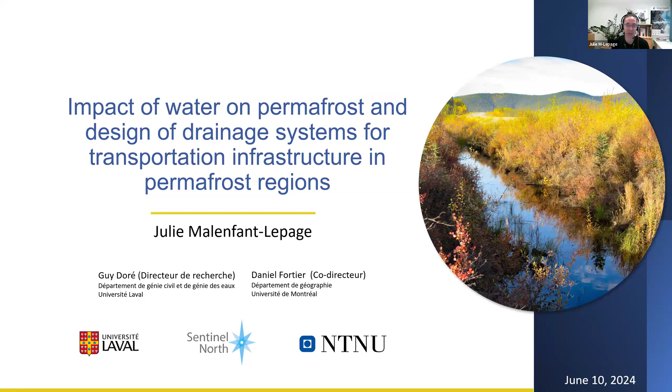We'll just reorganize this. Hi everyone, my presentation today will mainly focus on the research results that I obtained as part of my doctoral studies at Laval University in Quebec, Canada. The title of my presentation is Impact of Water on Permafrost and Design of Drainage System for Transportation Infrastructures in Permafrost regions.

The plan of the webinar today: I'll first start by addressing the issues of drainage in permafrost regions. I'll present the objective and hypothesis of my PhD project. Subsequently, I'll provide an overview of the study sites I had for the research and the main results I obtained for each of these. I will show you the results I obtained regarding erosion and advection. When I refer to advection, it means specifically the process by which heat is transported horizontally by a fluid from one location to another. I'll discuss the progress made during my research and conclude by giving a few recommendations for future research and for engineering practice.

Significant water-related problems around transportation infrastructures have been widely observed across Canada and the rest of the Arctic for several decades. But the warming and extent of damage caused by water flow have long been underestimated in permafrost engineering.

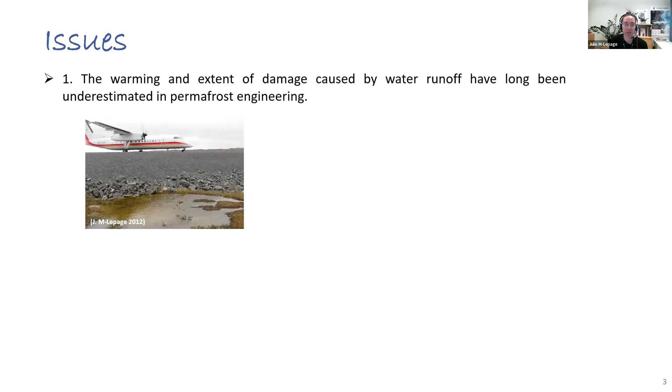I'll give here some examples of significant problems observed along roads and airstrips in the north. We often see water accumulation at the base of embankments in the north. This is a picture of one of the airstrips in Nunavik, north of Quebec in Canada. We see ruptures of culverts and failure of the drainage system. This is a picture taken in Alaska.

We also see a lot of settlements perpendicular to the roads, which are linked to water flowing under the embankment. I've been driving several times the Alaska Highway that drives through the Yukon territory towards Alaska, and I've seen very often towing patterns on the roads that are diagonal, and sometimes they have a little curve, and you don't really think they might be related because you don't see water. But once you go on Google and have a view from above, sometimes it's very obvious—there's a lot of ponding, a lot of water in the area. So that really helps to observe, to see, okay, there is water flowing in that direction, and that could be the cause of the settlements we have been observing.

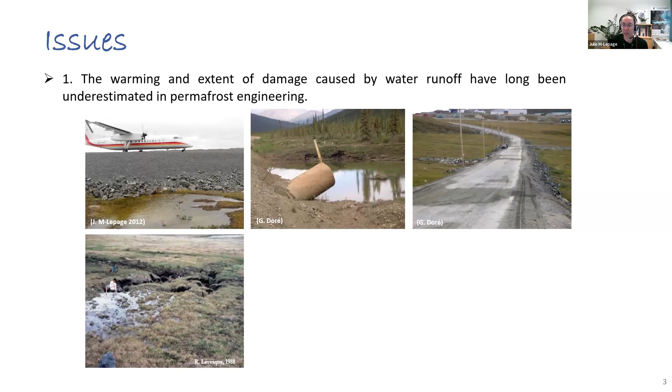In this photo, we see an important thermal erosion event which occurred in the spring of 1988 during the construction of the access road to the Salluit airport. The concentrated flow at the outlet of one of the culverts caused a 2-meter depth gully.

Here we see a significant depression at the toe of the Dempster Highway in the Yukon territory in Canada, and this depression is caused by groundwater flow and is recurrent—they keep filling it, and it always comes back. This photo shows a major thermal erosion event which occurred very quickly, within a month, following the rupture of an aqueduct in northern Russia close to a road. It really shows how quickly thermal erosion can occur.

As you can see, all these problems are likely to reduce significantly the lifespan of transportation infrastructures and safety for road users.

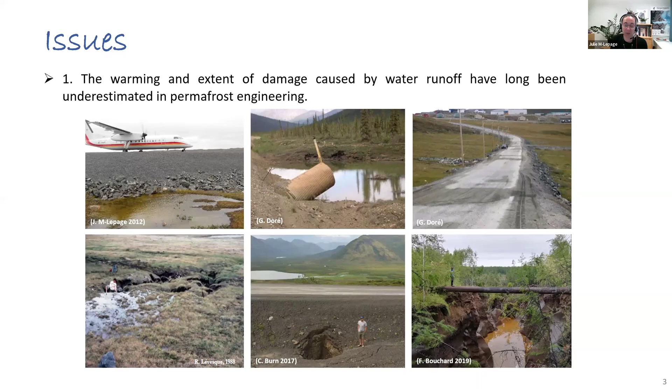What is important to know is that current drainage methods are limited to a set of recommendations to avoid excessive permafrost degradation. We can divide these into 2 main categories. The first is the method with low impact on permafrost, where we try to limit the heat transfer between water and the underlying ground, for instance.

There are many recommendations in the literature for culverts. The picture here is used mainly in the Yukon territory, in the western part of Canada, where they put insulation around the culverts to prevent heat transfer from water flowing into the underlying ground. Other methods in this category are the use of small bridges for crossing streams and permeable embankments.

The other category includes all the methods with controlled impact. So we know that we will have permafrost degradation, but we make sure it occurs as far as possible from the embankment to keep the integrity of our infrastructures. For example, there's a recommendation of building the ditch as far as possible from the embankment, with a current literature recommendation of 10 meters.

In this category we also have water diversion channels, diversion berms, and the addition of water ponding in areas of the drainage system to reduce thermal erosion. This method has been used in China, where they implemented drainage ditches perpendicular to the embankment to drain stagnant water at the embankment toe. But it's important to know that we don't know the thermal benefits of any of these methods, since they haven't been investigated up to now.

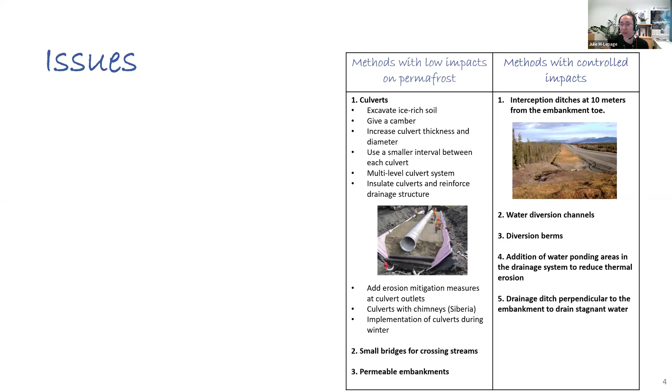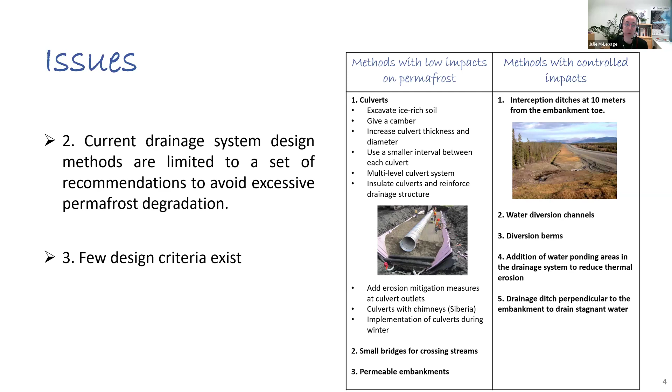The expertise that has been developed in Canada is very local and differs from one region to the other, and there are very few design criteria that exist at the moment. So there is a great need to improve knowledge on the key role of water flow and heat transfer to frozen soils, and on the performance of road drainage systems in permafrost regions.

The main objective of my PhD was to develop new strategies for the design of drainage systems to mitigate permafrost degradation issues resulting from water flow. We had 3 research hypotheses for my research.

The first is: can the Peclet number adapted to soil, proposed by Kane and collaborators in 2001, be used to quantify the risk of permafrost degradation around and under transport infrastructures, and therefore serve as a design parameter, since we don't have a design parameter at the moment?

The second hypothesis was: can the critical shear stress obtained by the erosion device CSM, and the approach proposed by Grabowski and collaborators in 2010, be adapted to frozen soils?

And the last one: is there a correlation between the water flow in a stream or a ditch and the thaw depth?

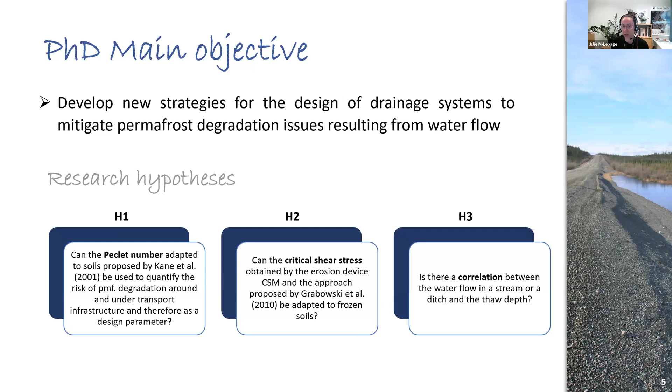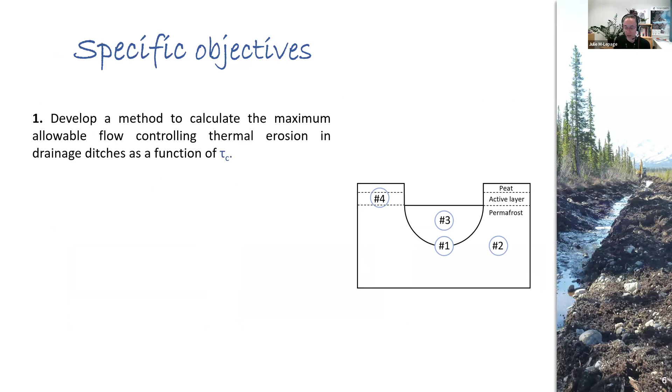Following the hypotheses, we had 4 specific objectives. The first is to develop a method to calculate the maximum allowable flow controlling thermal erosion in drainage ditches as a function of the critical shear stress. You have a sketch of a drainage ditch on the right, showing exactly where each specific objective applies. For this one, it will be at the bottom of the drainage ditch.

For the second objective, I had to develop a method to limit heat advection caused by subsurface flow along and under transportation infrastructures based on the Peclet number. The third is to develop an allowable flow criterion based on a relationship between water flow in a ditch and thaw depth. The last was to develop a relationship between the thickness of the active layer and the temperature at 30 centimeter depth.

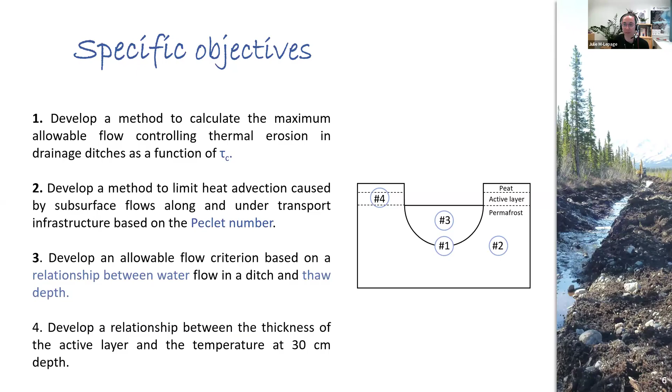Regarding the field work, the main goal was to improve knowledge on the thermal impact of water flow in natural conditions at the beginning, and on the performance of transportation infrastructures in permafrost areas. We selected 3 test sites across the Arctic as part of this research, where the ground is known to be sensitive to permafrost degradation and thermal erosion.

The first test site is in Ilulissat, Greenland. Then I had another test site in Salluit, in the northern tip of Quebec province, Canada. And traveling to the west of Canada, I had a test site right at the border between Alaska and Canada. You also see here the Beaver Creek test site, since I've been using data from this test site for the validation of my results.

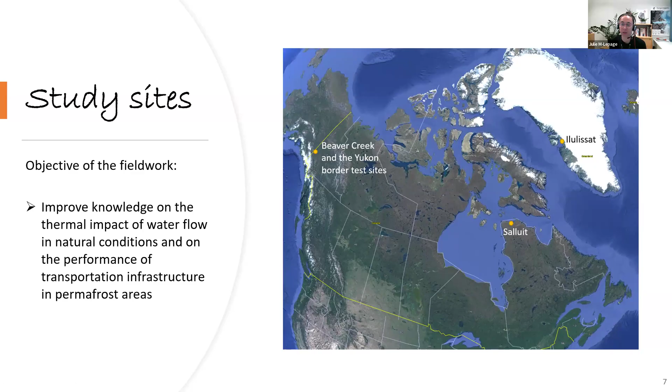All 3 test sites are characterized by fine grain and ice-rich permafrost having a zero annual amplitude near -3 degrees Celsius. At the first site, in Ilulissat, Greenland, the main goal was to study the vertical and horizontal extent of permafrost degradation caused by water flowing and ponding.

So I took a lot of surface measurements at the test site, such as thaw depths, temperature in shallow boreholes, soil temperature at 30 centimeter depths along the profile, stream flow, water temperature, as well as water content of the active layer and permafrost.

So here you see the profiles that were done across the stream and across the two ponds. This site was chosen specifically for this research because of the small, well-defined catchment area. It's very small and there's no trees as well, so it was really easy to see water flowing at the surface.

Also because of the possibility of comparing the results obtained with previous intensive studies carried out in Ilulissat between 1978 and 1985 in connection with the airport construction. So we have a lot of data in this area. The Technical University of Denmark has also done automated ERT surveys south of the airport in past years, surveying through a whole year.

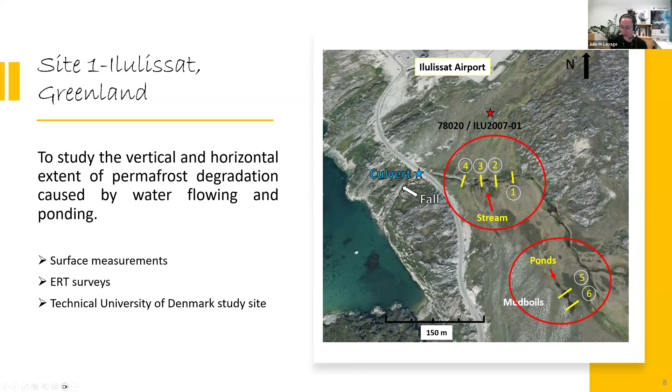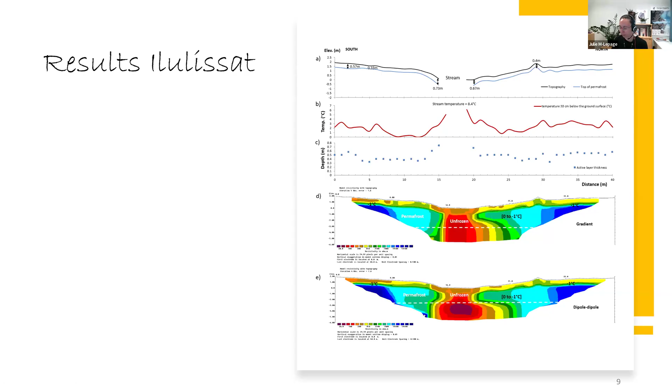So the main result I obtained is that permafrost degradation due to the presence of water occurs mainly vertically. It was really interesting to see at the site that I was probing permafrost just by the stream, and it was very, very close to the surface.

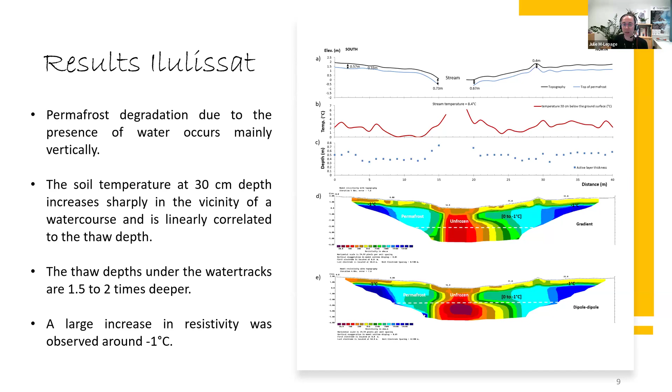The soil temperature at 30 centimeters depth increases sharply in the vicinity of the watercourse and is linearly correlated to the thaw depth. The thaw depths under the water tracks are 1.5 to 2 times deeper. We observe a large increase in resistivity around -1 degree Celsius at the site, and not necessarily between the limit of frozen and unfrozen ground.

The second test site is located along the Alaska Highway, very close to the border with Alaska. The main goal of this test site was to evaluate the performance of a newly constructed rectangular ditch located 10 meters from the embankment near the Yukon-Alaska border.

It's very common in this area to build rectangular ditches, and we expect that permafrost will be degrading. So we put it at a certain distance from the embankment, and once the permafrost is degrading, at some point the vegetation cover will fall over the slopes and protect permafrost again, and we will reach stabilization.

And now there's one that was added between the ditch and the zone between the ditch and the road, added last year. We did also flow rate measurements in culverts during the research, and the ditch has been mapped every year, either with a DGPS, high precision zip level, and we have also LIDAR data available at the test site.

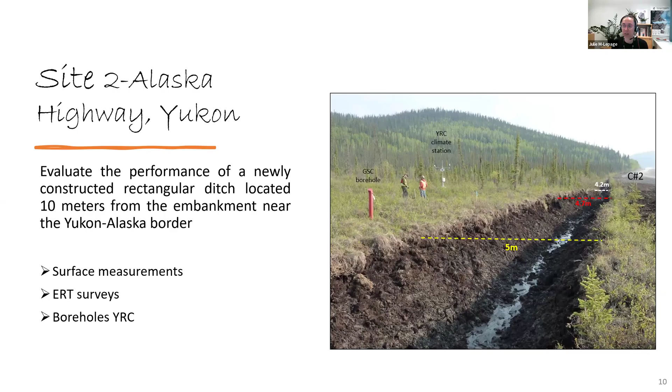It is a site that contains a large network of ice wedges estimated to be over 10 meters deep. The figure you see compares the elevation profiles taken between 2015 and 2017 with the cross-sectional area of soil excavated during the ditch construction in 2013. This is the square you see on the figure.

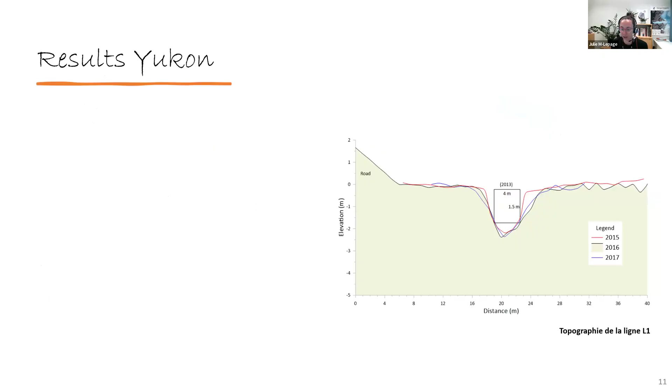If we look at the results, the permafrost thawed very rapidly at the test site in the interceptor ditch during the first 3 years after construction, but the ditch appeared to have stabilized thereafter on the short term. We have now the elevation data for last summer, so I'll be able to see if the ditch is still stabilized on the long term, after 10 years. But in the first 3 years, it did really seem to have stabilized.

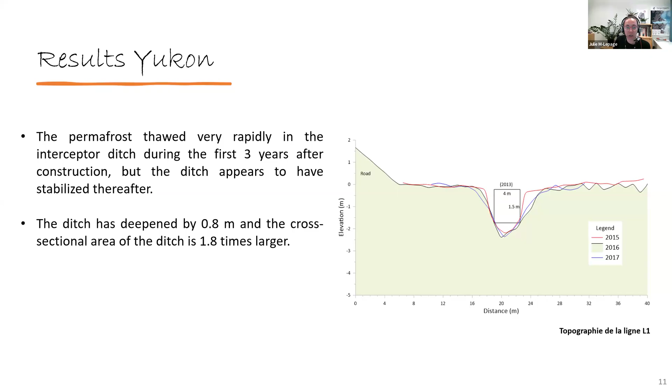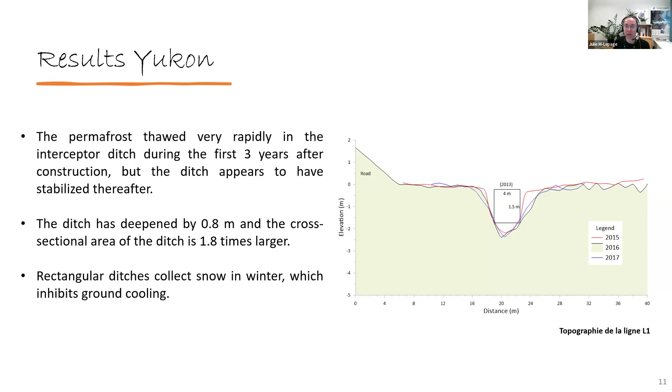From 2013 to 2016, the ditch has deepened by 0.8 meter, and the cross-sectional area of the ditch is 1.8 times larger. Rectangular ditches do collect snow in winter, which inhibits ground cooling. We see that with the borehole located in the ditch. Permafrost here is quite cold, close to -3, so we have to be very careful if we do those ditches in very warm permafrost.

The drainage slope of the new ditch may become inadequate after 2 years of operation, because after construction there was a lot of permafrost degradation that was filled with water. So the drainage can become inefficient very rapidly. It's very important that we maintain those ditches regularly until we reach stabilization.

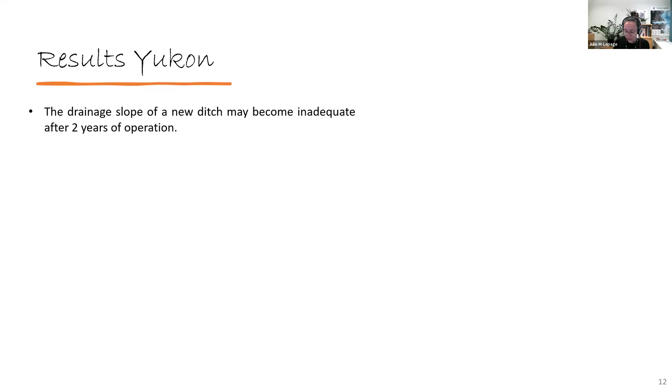Following the excavation of the ditch, there was a waterfall that was created and led to the formation of a thermal erosion gully. The retreat rate we measured was 23.6 meters per year, which is very significant, between 2014 and 2017. And it has a depth of 2.8 meters. The thermal erosion developed into a thermokarst.

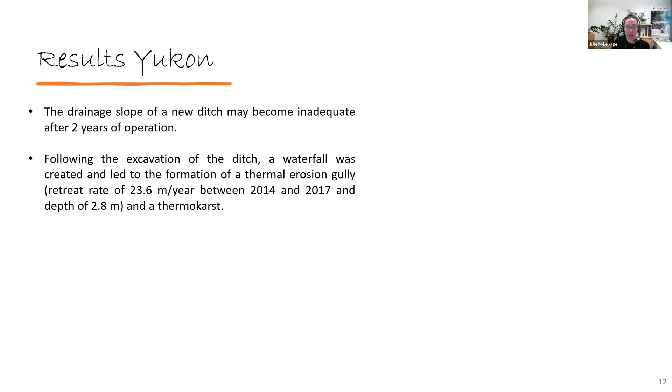I'll show you some pictures here. You have the fall that was created just after the ditch was excavated, because there was a small stream coming perpendicularly to the ditch. Then in April 2015, when we went to the site, we observed that the ground was cracked on the surface and that the stream was now flowing on the ground.

Water probably infiltrated into a sinkhole, and the melting of an ice wedge and an underground tunnel developed. Four months later, in September 2015, the tunnel ceiling had collapsed and a pond had developed at this location. The degradation of permafrost progressed in the following years and led to the development of a thermokarst. Now the water regime in the ditch has changed, because water accumulates in the thermokarst and flows in the ditch only when full.

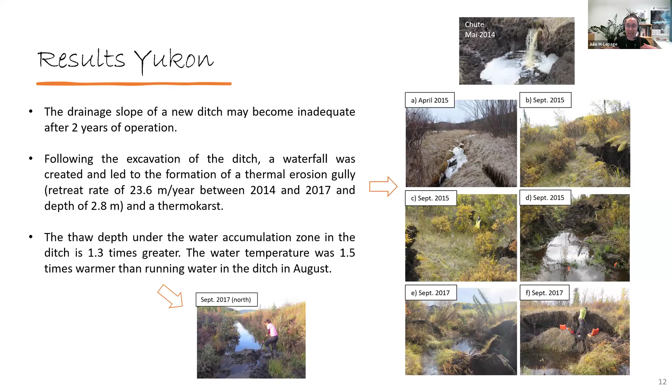Here you see a picture of one of the sections of the ditch. The ditch is 500 meters long, so it's quite long. What happened is that at a few locations the ice wedges melt and release a lot of sediments into the ditch, completely obstructing the drainage. At this location, water has been ponding since the beginning, a very big pond of several meters.

We tried to drain it, but it was not successful, so the water has been standing there since then. What we observe is that the thaw depth under the water accumulation zone in the ditch is 1.3 times greater compared with areas where there's no water ponding. And the water temperature was 1.5 times warmer than running water in the ditch in August.

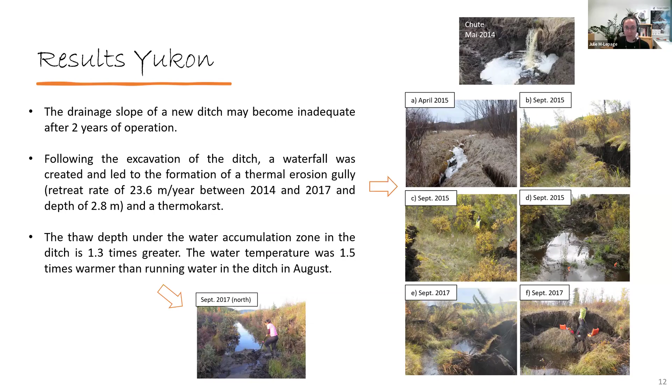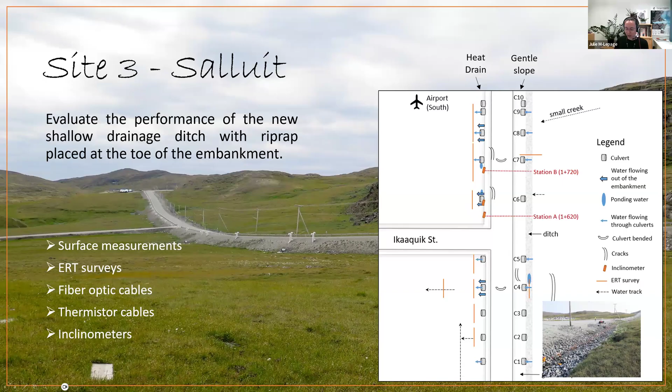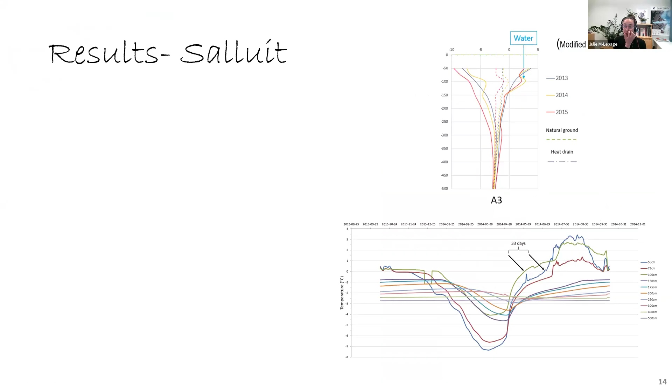The thermistor cables incorporated into the airport access road in Salluit in 2012 made it possible to measure the effect of water flow underneath the road embankment, a phenomenon that is rarely captured. So we did measure a warming of 1.9 degrees Celsius at 1 meter depth on the annual maximum temperature curve that you see on the right.

The borehole is located upstream of the road at the embankment toe. And if you look here, you see kind of a wave in the profile. This is linked to water flow at the test site. So you really have to keep an eye on those wavy profiles in your data, it might be related to water.

And what we observe as well, if you look on the ground thermal regime at the bottom, is that the ground thawed 33 days earlier at 1 meter depth than the ground above at a depth of 50 centimeters.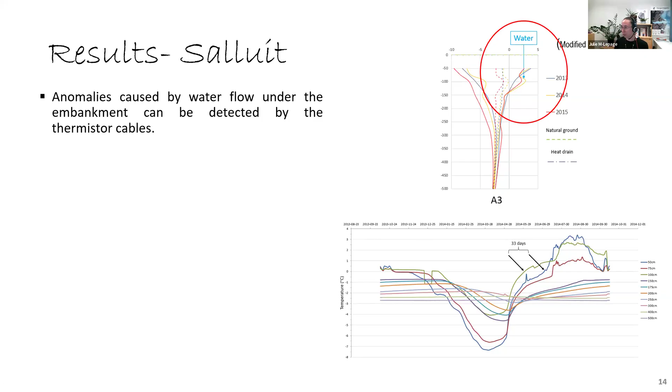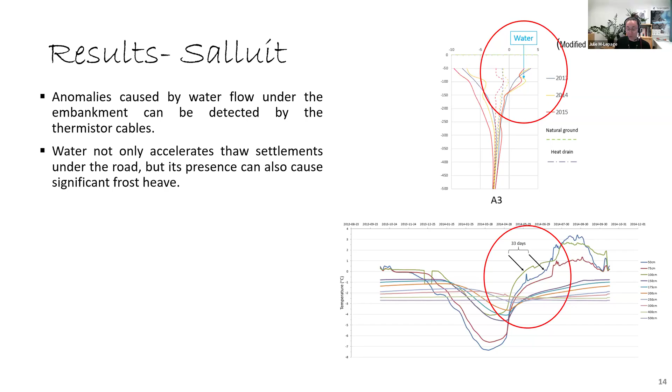We also found out that water not only accelerates thaw settlements under the road, but its presence can cause significant frost heave. I'll show you a picture that is quite relevant.

First, when I visited the test site, I've seen this huge crack along the road, so we were really sure that permafrost was degrading in the embankment slope, even if there was a heat drain that was implemented. But after investigation and analysis of the data from the inclinometer, the team at Université Laval found out that permafrost was not degrading at all, but it was really the movement of frost heave due to water flowing under the road.

So in the winter, when you have freezing, the slope lifts, and then it kind of slides down in the summer during the warm period.

And then as a conclusion, we add that the heat drain can limit permafrost degradation even if there are water flows under the road.

And ERT identifies thaw-sensitive areas along the road. So I strongly recommend using it if you have any drainage work to do along your infrastructures. It's very important to know which zones are very close to thawing.

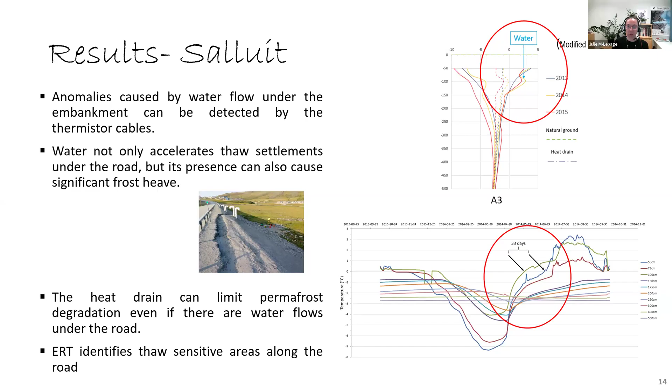Usually if you take temperature measurements, you don't really know how close the ground is to thawing, but with ERT surveys, since it's very sensitive to unfrozen water content, you can really see, okay, that zone, I really need to be careful and make sure water won't be concentrated or ponding into this area. So ERT can be a very useful tool for this.

Regarding the result for the erosion tests, it's important to be aware that sediment motion initiation has been widely studied for over a century, but the erodibility potential of frozen soil is still poorly understood and has been less documented in the literature. So during my PhD, I did some erosion tests to determine the critical shear stress for a frozen silt, which is the type of soil considered to be the most sensitive to erosion.

The critical shear stress is an important erosion parameter and is defined as the pressure generated by water on the soil surface when erosion is initiated.

For my research, I've been using an erosion device called the cohesive strength meter that was developed in the UK. I did these experiments in the lab at the Norwegian University of Science and Technology in Trondheim.

There was a great need in the marine research group here at NTNU to obtain critical shear stress values for the Arctic coastal erosion models. So then we collaborated together on this project.

I also brought the cohesive strength meter to my test site, and I did some in situ measurements. Why is this relevant? There's a lot of erosion devices, and I'll explain why we decided exactly to choose that one.

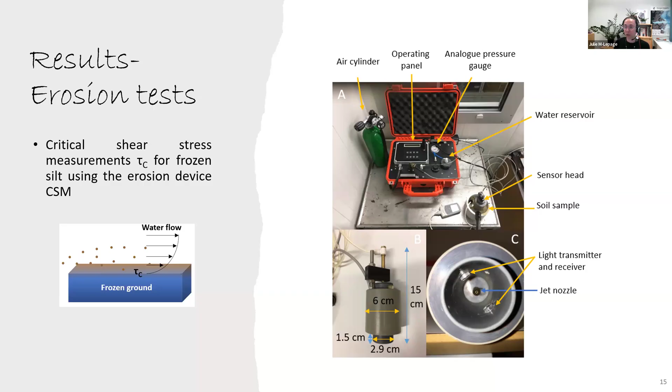And all the soil samples that I tested in the lab were saturated, with no excess water content.

And then there's some processes to do with the data coming from the cohesive strength meter. So I followed the methodology proposed by Grabowski and collaborators. Once you need it, it's very important that you transpose the pressure measured inside the sensor head into a pressure at the soil surface.

So I've been using the methodology from Vardy and collaborators in 2007. Then I calibrated my device in the lab, and I obtained my own equation of P stag, mean pressure at the soil surface. And then once you have this, you need to transpose this vertical pressure into a horizontal pressure. So I used the equation developed in the laboratory by Grabowski and collaborators.

And then once you have the horizontal pressure, you obtain the critical shear stress. So what they did in the lab was test different soil sample mixtures with a flume and a cohesive strength meter, and that's how they obtained the correlation between the two devices.

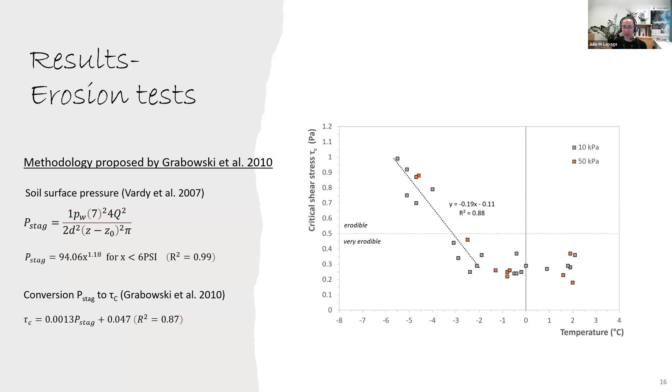If we look at the data I obtained in the lab, it's important to say I used a water temperature of +2 degrees Celsius for my tests. On the graph here, you have temperature and critical shear stress. For temperature below -2 degrees Celsius, the critical shear stress at which soil particles are removed is temperature dependent. The critical shear stress of the silt tested increased by a factor of 1.6 for every degree Celsius decrease between -2 and -6.

But if you look at the data for the partially frozen ground between 0 and -2, and for the unfrozen ground samples, the averages are very similar. I obtained a value of 0.28 Pascal for partially frozen and 0.27 Pascal for unfrozen ground.

It is generally believed that frozen ground cannot be easily eroded since ice bonds soil grains together, increasing the strength of the soil when the ground is frozen. However, the results we have in this study show that this bonding starts to be effective against erosion only at -2 degrees Celsius for a saturated frozen silt.

But it's very important to be aware that if we test different types of soils or clays, for example, we probably need to expect that this relation can be different depending on the unfrozen water content.

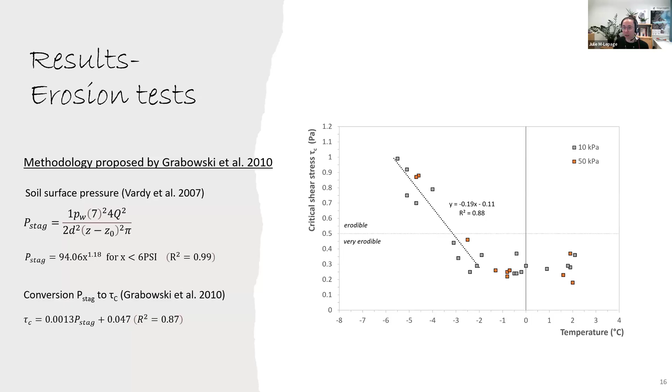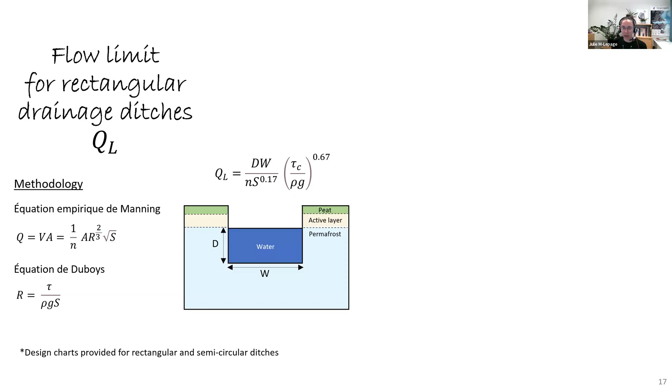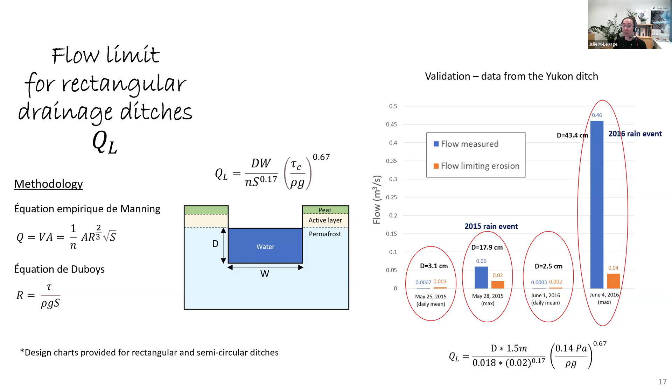So probably what is occurring at the test site is that a year before, a thermokarst developed, and then all the water coming from snowmelt accumulates in the thermokarst, and the small stream flows directly into the thermokarst. So water accumulates at this location until it gets full, and then all the water is released very rapidly into the ditch. That's probably why we measured such a high flow rate, but it means at the same time that more erosion is expected to occur at the test site in the following years.

I just wanted to come back on the different heat transfer mechanisms. So the three main mechanisms of heat transfer are radiation, conduction, and convection.

So very rapidly, times are flying. Convection is the process of heat transfer involving the movement of the fluid, and it is obtained by using Newton's law of cooling, which looks very simple. So H is the coefficient of heat exchange by convection, Ts is the temperature at the soil surface, and Tf is the temperature of the fluid.

But however, there is a very high variability of the coefficient H. It can vary between, for instance, 100 and 900 watts per square meter per degree Kelvin. So the equation is very difficult to use. And moreover, we don't know most of the time what is the temperature of the soil and what is the temperature of the fluid.

That's why the equation of convective heat transfer has shown that dimensionless numbers are very useful to solve fluid mechanics and particularly convective problems.

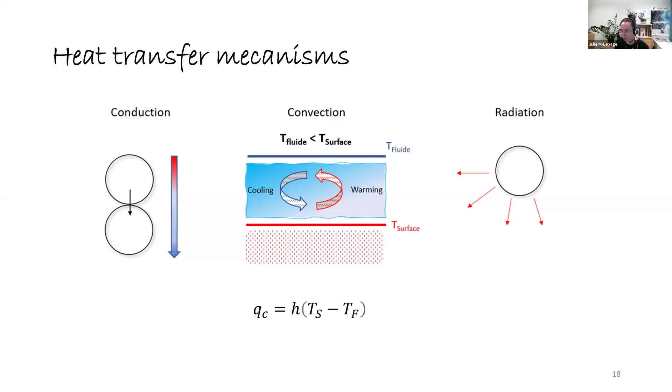So that's one of the reasons why we wanted to adapt the Peclet number proposed by Kane and its collaborators for Arctic soils, to groundwater that occurs along transportation infrastructures built on permafrost.

So this is the equation that has been proposed by Kane and its collaborator. Here you have the fluid density, the specific heat, the fluid velocity, the length over which heat transfer occurs. And then this is a ratio if you're looking at heat transfer over a long distance. And here you have the thermal conductivity.

If you have a Peclet number above 1, that means that convection is dominant. And if it's below 1, that means that convection is not significant and conduction is the main heat transfer mechanism.

And then I rewrite the equation provided for two different situations to make it a little bit clearer. So this equation is for rain and snow infiltration. What is different here is the speed of infiltration into the ground, and D is the depth of unfrozen soil where heat transfer occurs.

And for groundwater flow, here you will have the hydraulic conductivity, and S is the slope of permafrost, because we made the hypothesis that the hydraulic gradient is probably equivalent to the slope of permafrost, or even the slope of the soil surface.

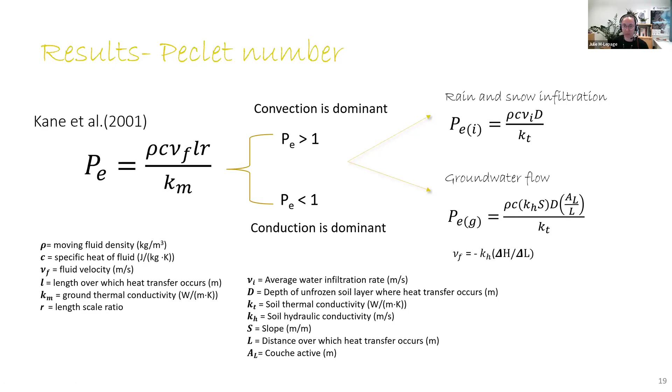So it has been demonstrated by the Laval University that groundwater crossing the road at the Beaver Creek experimental site caused the ground beneath the road to warm between 2 and 4 degrees Celsius. So I did use this test site to validate the data.

The Peclet number has been calculated for 3 different situations. The first one is for initial conditions, prior to the road construction. So I calculated the Peclet number when water was flowing over a distance of 20 meters. At the test site, there is 0.4 meter thickness of peat over 0.3 meters of thawed silt, and the slope is 4.2%.

So the Peclet number obtained is 0.34 if water is flowing through the peat layer, and 0.004 if water is flowing through the silt layer.

If we look at the second condition, after road construction, most of the time the thaw depth underneath the road will increase. So I did the same calculation for a thickness of 2 meters that was measured at the test site in Beaver Creek. So for the same, if I do the calculation again, I obtain a Peclet number of 0.08.

So again, there is no convection occurring for this situation. But most of the time, once you build a road, permafrost will start thawing, and you will have a depression that forms underneath the road, and this depression will be filled with embankment material having higher hydraulic conductivities.

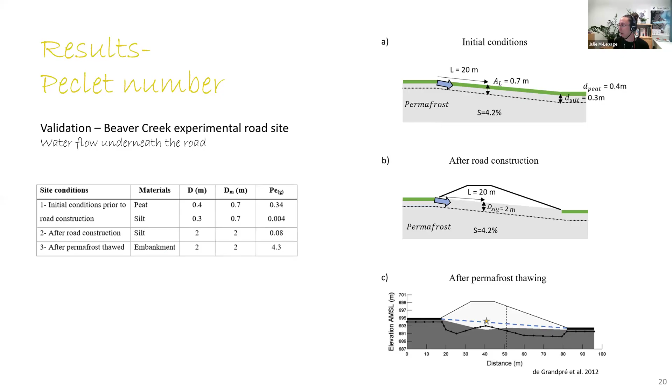It was observed during that research that rectangular ditches do stabilize as expected, but it's important to pay particular attention when there is a water course flowing into the ditch, and the initiation of the thermal erosion gully that developed at the Yukon test site can be explained with the Peclet number.

If you look at the graph on the right, you have the slope and then the Peclet number. So the construction of the rectangular ditches changed drastically the natural flow slope. We had a slope of 1% at the beginning, and it changed to 90% locally. So when we do that, the Peclet number increases and then we have convection. And then with time, you get permafrost degradation, and the slope is lowering down.

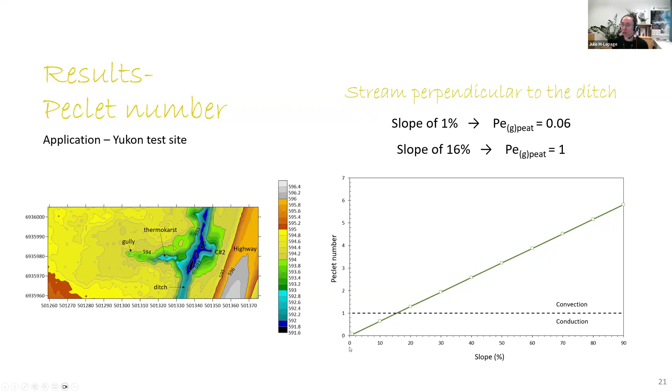From the graph, you see as well that if the slope gets less than 16%, convection should start to be less significant at this test site.

The Peclet number also makes it possible to determine the minimal distance required between the ditch and the embankment toe. So here is quickly an example from the Yukon test site. We have 3 locations for potential ditches, number 1, 2, and 3. This one is at the toe of the embankment, 2.75 meters, 4.75 meters. I calculated the Peclet number for all these situations, and I succeeded in probing the top of permafrost in this location.

But as you know, once you get close to the embankment, it's very hard to probe. The soil is very dense, there's a lot of granular material. So I used the relation I developed during the research, where I get the active layer thickness according to the temperature at 30 centimeter depth I measured.

All the dots are related to the data I measured in the field in Ilulissat and in the Yukon. I measured the temperature at 30 centimeters depth at this location, and then I obtained an estimation of the active layer for the calculation, from which I obtained a slope of 9%.

If you look at the results, we have a Peclet number of 1.69 here, number 2 at 0.31, and number 3 at 0.07. So probably the most optimal drainage ditch will be number 2, because we need to make sure the Peclet number is below 1. But we don't want to have the ditch too far away from the toe, so we want to make sure we don't have water ponding and that it is drained as well.

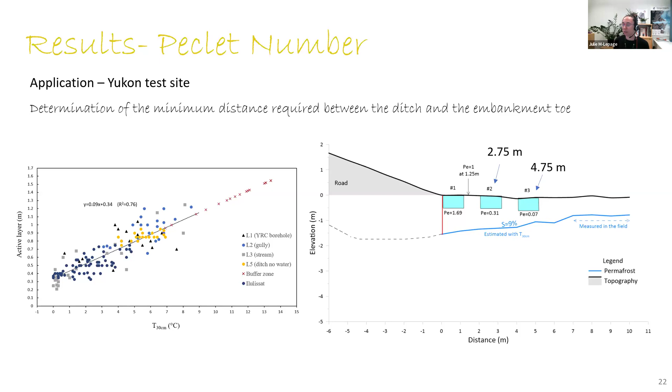But we still need to determine which Peclet number will be optimal, or if it's between 0.1 and 0.5, for example.

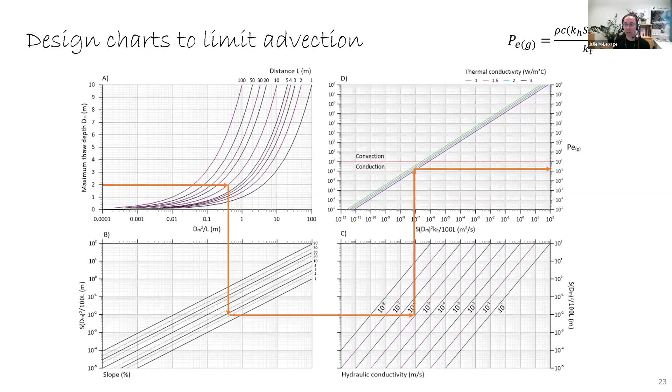And I developed some design charts to limit advection based on the Peclet number. So very quickly, you choose the maximum thaw depth at your test site, the distance traveled by water, the slope of your test site, the hydraulic conductivity, the thermal conductivity, and then you obtain the Peclet number for your design.

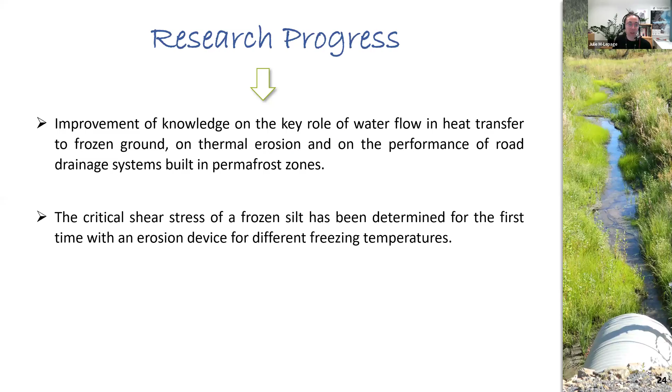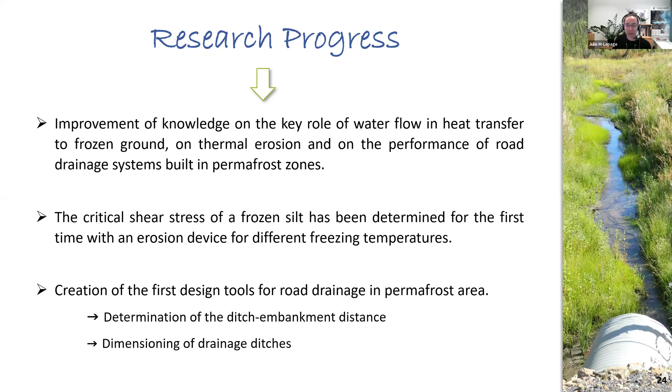The research progressed: we improved knowledge on the key role of water flow in heat transfer to frozen ground, on thermal erosion, and on the performance of road drainage systems built in permafrost zones. The critical shear stress of a frozen silt has been determined for the first time with an erosion device for different freezing temperatures. And we created the first design tool for road drainage in permafrost areas that helps determine the ditch-embankment distance and the dimensioning of drainage ditches.

I want to come back to the specific objectives I presented at the beginning. We succeeded in answering 3 of them, but not number 3, which was to develop a flow criterion based on a relationship between water flow in a ditch and thaw depth, because it is very hard to measure the flow rate at a test site.

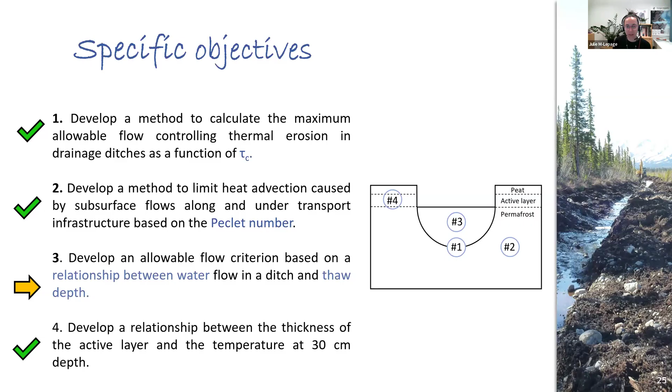Sometimes we arrive at the test site and the water is flowing underneath culverts, or sometimes we measure the flow into the culverts, but it comes from 2 different directions. So we don't know, do we have 75% of the flow from that direction? It has definitely been a challenge to measure flow rate in the field, so we really need to work on this aspect.

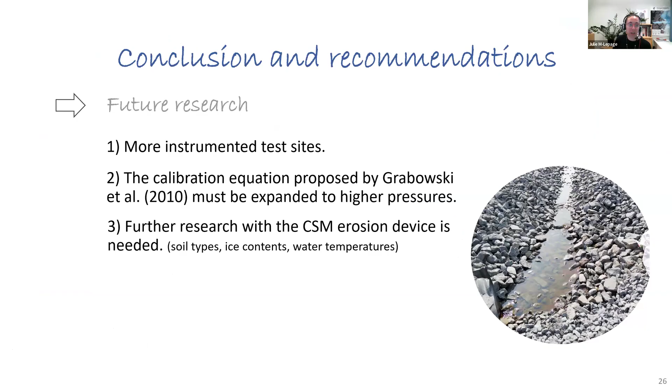I have a few conclusions and recommendations for future research. We need more instruments at the sites. Definitely, the calibration equation proposed by Grabowski must be expanded to higher pressure, because for now it's very limited. Further research with the cohesive strength meter device is needed on different soil types, ice content, and water temperature.

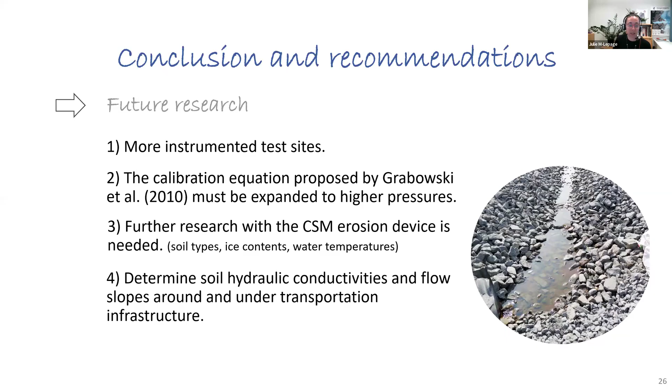We need to determine soil hydraulic conductivities in the north; we don't have a lot of data on this. We also need to know the flow slopes around other transportation infrastructures, as we have very limited data on this. And it would be important to convert the Peclet number to heat flux.

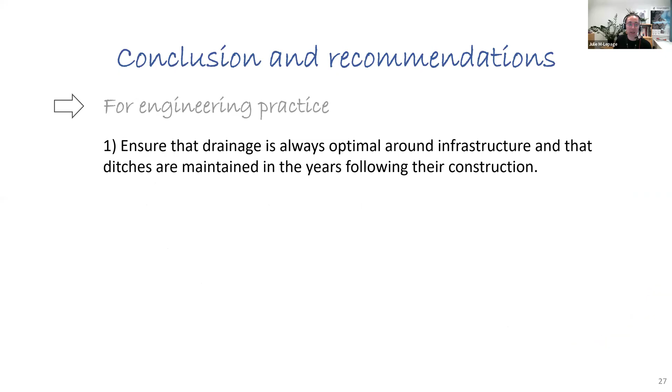For engineering practice, we need to ensure that drainage is always optimal around infrastructures and that ditches are maintained in the years following construction.

The flow estimation for the northern watersheds must be improved because we have very little climate station at the moment in the north.

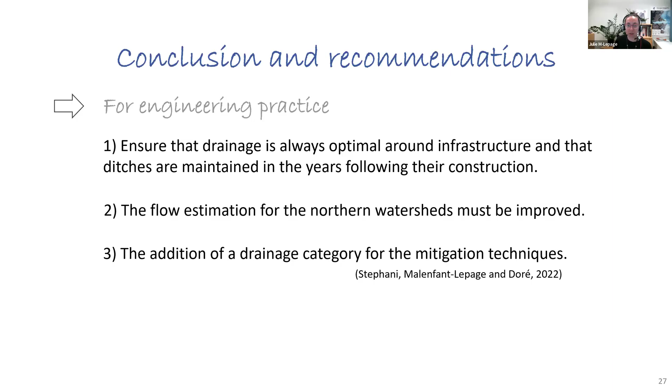The addition of a drainage category for the mitigation technique will be very important. We really need to make sure we understand all the techniques implemented for drainage, because if we implement a quite expensive mitigation technique to cool the ground, but don't control the water, it can definitely limit significantly the benefit of the mitigation technique implemented.

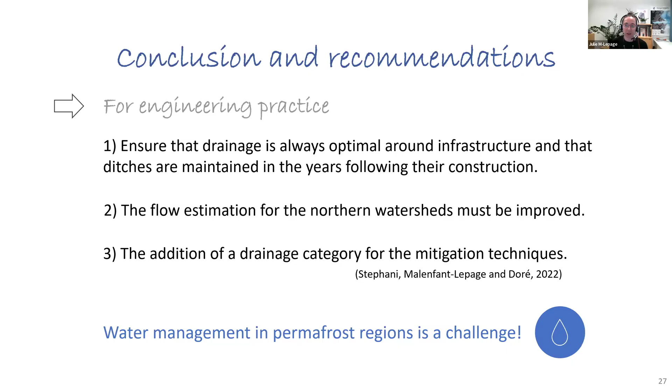And finally, water management - I would like to conclude with this. Permafrost region research is really a challenge, and it requires knowledge from a lot of disciplines. So I really believe that we will move forward to multidisciplinary research with multidisciplinary research themes.